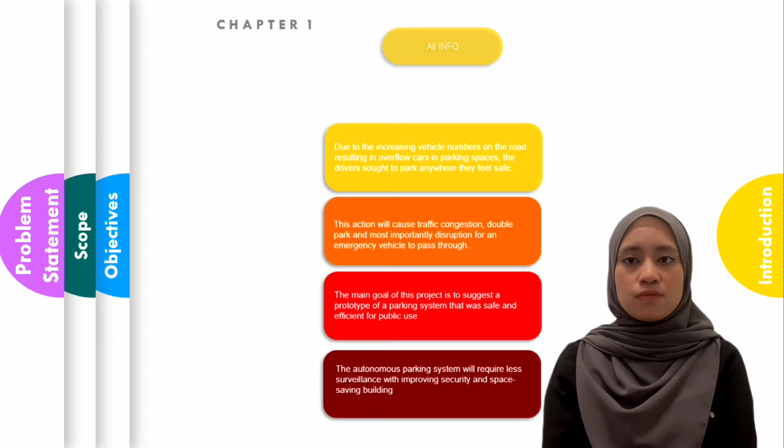So the main goal of this project is to suggest a prototype of a parking system that is safe and efficient for public use. The autonomous parking system will require less surveillance while improving security and space-saving building.

Next is the objectives. There are 3 objectives for our project. Firstly, easy accessibility to parking spots. Secondly, to provide safer parking spots - we want our customers to feel safe when using our vehicle integrated parking system service. Lastly, our aim is to build a convenient parking method.

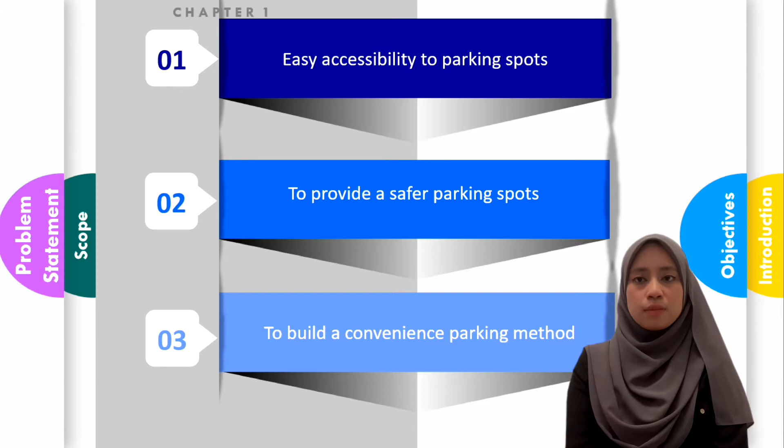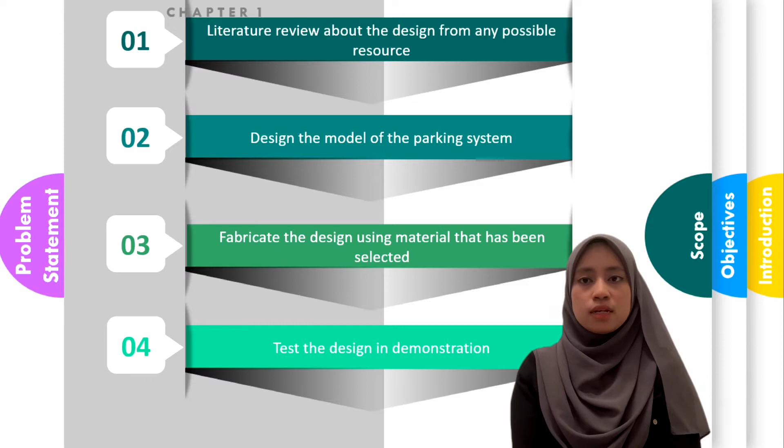There are several scopes involved in this project. First, a literature review about the design from any possible resource. Secondly, design the model of the parking system. Next, fabricate the design using material that has been selected. Last but not least, test the design in demonstration.

The next slide is the problem statement. Before starting this project, we noticed 6 problems that people nowadays may encounter. Then we came up with the idea of doing this project named Vehicle Integrated Parking System.

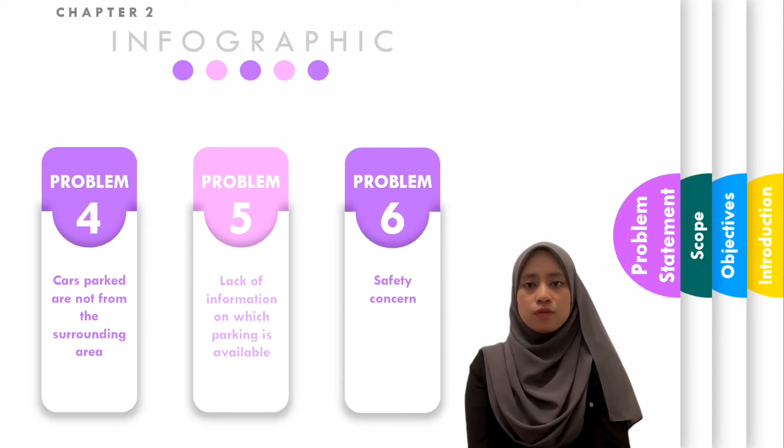The first problem is limited parking spaces, especially during peak time. Next, time-consuming and different parking policies. Thirdly, excessive automobile usage. Fourthly, cars parked are not from the surrounding area. Next, lack of information on which parking is available. Lastly, safety concern.

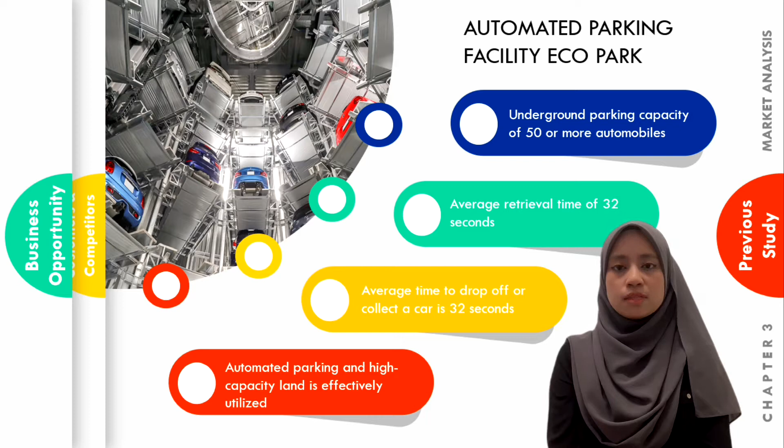With an average retrieval time of 32 seconds, it is a very efficient system. The average time it takes to drop off or collect a car is 32 seconds. It is automatic parking with high capacity, and land is effectively utilized.

Next, the towering parking system. This parking system uses the concept of multi-level towering building design. This design has the capacity for up to 60 cars. It is also a space-effective installation, consuming only 3 parking spaces. The maximum weight for this design is 2,200 kg.

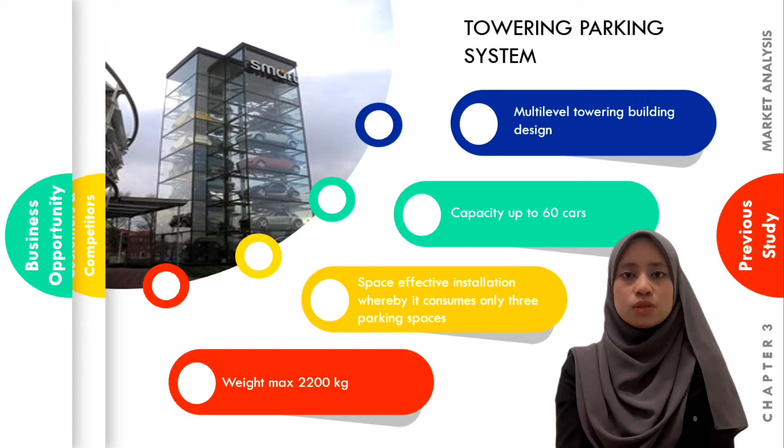Next, the vertical rotary smart parking system. This is an economical parking system because it requires only 50 square meters for a capacity of 50 parking spaces. It is convenient as customers can use PLC automatic control, a button or a swipe to access the car function. This system is fast and can save customers time, and is widely used in shopping centers, commercial buildings, hotels and so on.

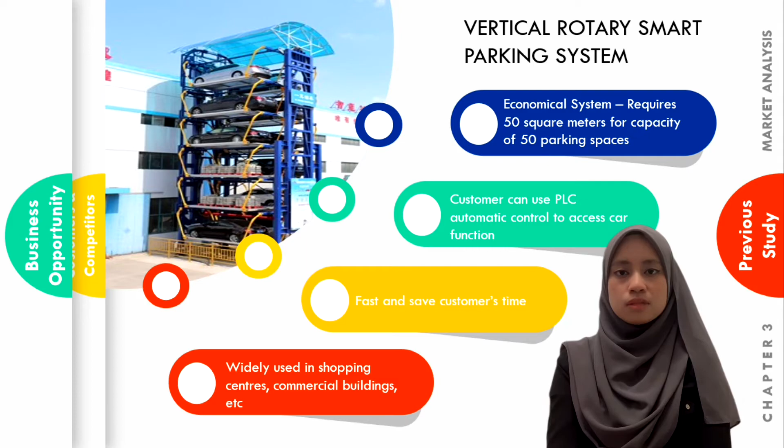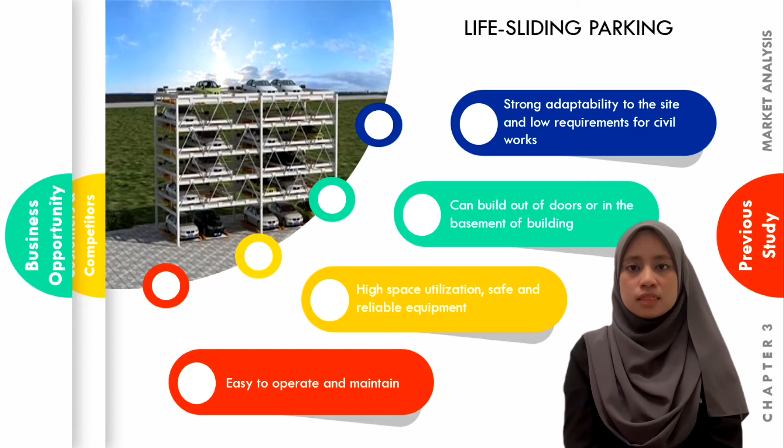This parking system can be built outdoors or in the basement of a building. One of its advantages is high space utilization, and safe and reliable equipment. This parking system is easy to operate and maintain.

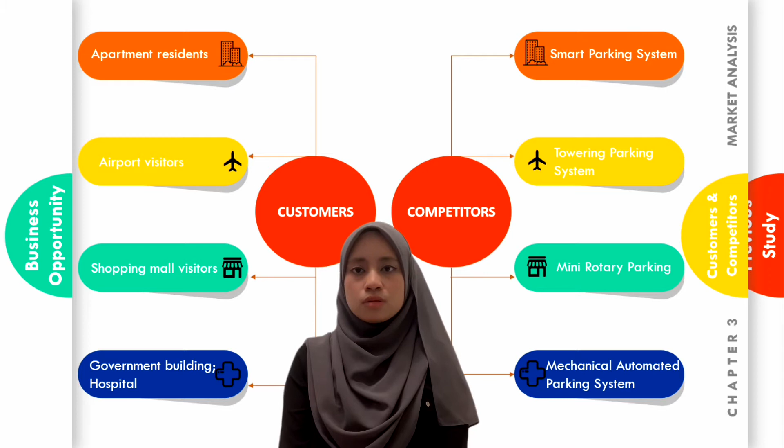Next slide is customers and competitors. A customer is a person who buys goods or services from a shop or business. Our targeted customers are apartment residents, airport visitors, shopping mall visitors, and government buildings such as hospitals. A competitor is an organization or country engaged in commercial or economic competition with others. Our targeted competitors are smart parking systems, towering parking systems, rotary parking, and mechanical automated parking systems.

Today I'm going to present about customer requirements and engineering characteristics. For the first customer requirement, easy accessibility to the parking spot. The engineering characteristic is an access card or smartphone application. The unit used is time, measured in seconds.

Customer requirement number 2 is safer parking spots. The engineering characteristic is limited access inside the system, and the unit is N/A.

The customer requirement number 3 is weatherproof, and the engineering characteristic is resistant weather. The unit is degrees Celsius.

Customer requirement number 4 is convenience parking method, and the engineering characteristic is automated drop and walk parking system. The unit is time.

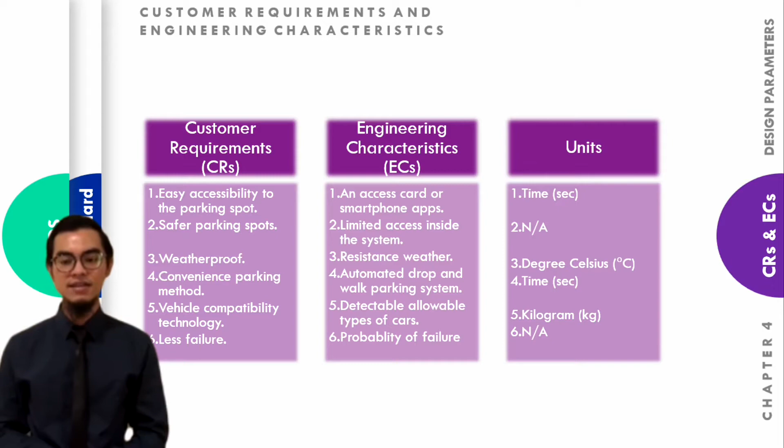Customer requirement number 5 is vehicle compatibility technology, and the engineering characteristic is detectable allowable types of cars. The unit is kilogram. The last customer requirement, number 6, is less failure, and the engineering characteristic is probability of failure. The unit is N/A.

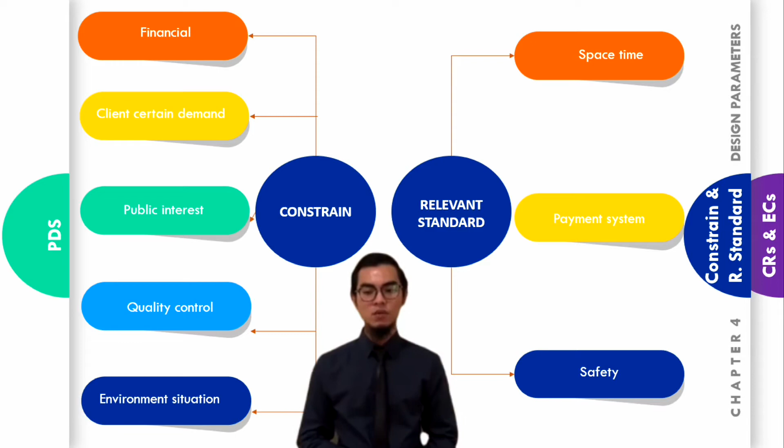Next, I will talk about constraints and relevant standards. There are 5 constraints: financial, client certain demand, public interest, quality control, and environment situation. For relevant standards, there are 3: space-time, payment system, and safety.

Now I'm going to talk about product design specification, key project deadline, physical description, and market identification. The first product design specification is our project name, Vehicle Integrated Parking System. Number 2, our project provides systematic automation and organized parking space.

Number 3 is about special features. There are 3 special features: accessible by using an access card or through a smartphone application; number 2, drop and walk parking method; and number 3, theftproof.

The fourth product design specification is key performance target. There are 3 key performance targets: weatherproof, easy parking method, and lesser failure percentage. The last product design specification is user training required: none.

For the key project deadline, we have 6 months to finalize design and report. The physical description, number 1, is external dimension.

For the prototype, the dimension is 50mm by 30mm by 10mm, and each of the 4 compartments for a car is 80mm by 70mm by 120mm. The material is to be determined.

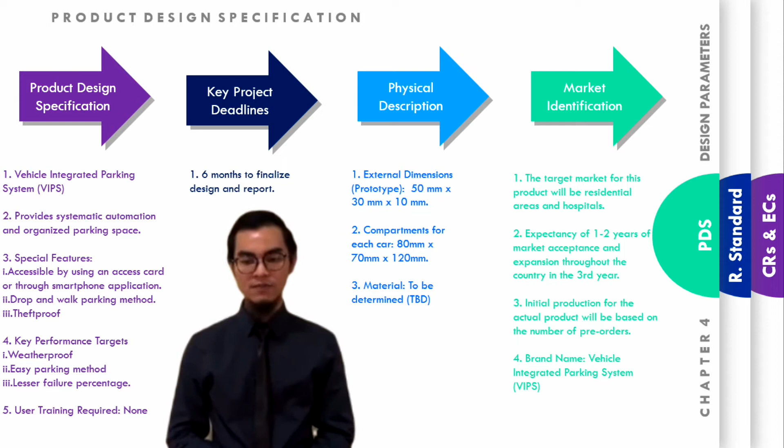For market identification: number 1, the target market for this product will be residential areas and hospitals. Number 2, expectancy of 1 to 2 years of market acceptance and expansion throughout the country in the 3rd year. Number 3, initial production of the actual product will be based on the number of pre-orders.

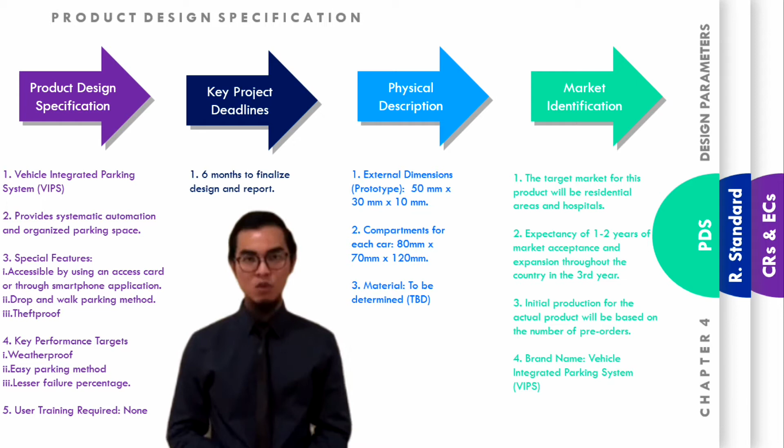This brand name is Vehicle Integrated Parking System, which is our project name. Next is about financial requirement.

There are 4 financial requirements. Number 1, pricing policy over the life cycle: target manufacturing cost is to be determined, and estimated retail price is 40% higher than the target manufacturing cost.

Number 2 is the warranty policy, which is 5 years with yearly inspection. Number 3, expected financial performance or rate of return on investment is more than 20%. The last financial requirement is level of capital investment required, to be determined.

For the life cycle targets, there are 4. Number 1, useful life and shelf life is more than 5 years expectancy. Number 2, cost of installation and operation is to be determined.

Number 3, maintenance schedule is yearly inspection and maintenance. Number 4, reliability, mean time to failure is 5 years.

Next I will talk about manufacturing specification. There are 2. Number 1, for the prototype, all framing, electrical motor, and gear components will be assembled in-house.

Number 2 is suppliers; the supplier is none. The next part is social, political and legal requirements.

There are 4 social, political and legal requirements. Number 1, safety and environmental regulations will be followed. Number 2, standard research federal regulation on available land. Number 3, safety and product liability.

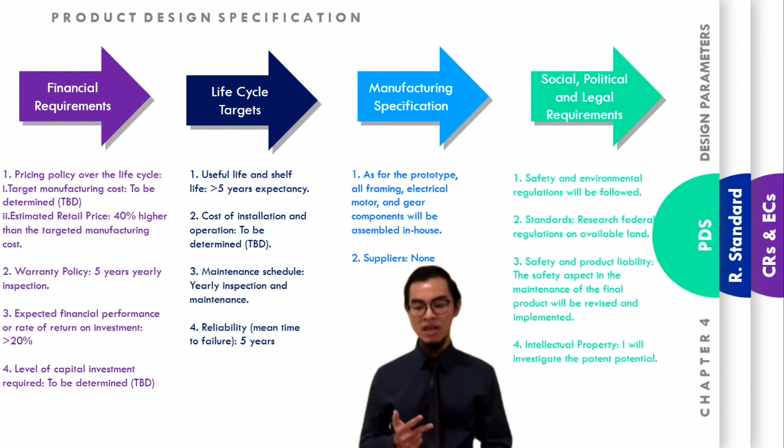What is a concept design? A concept design is a starting point on visualizing the product idea with multiple images. From the customer surveys, product benchmark, and product design specification, we came out with the customer requirement and engineering characteristic needed to draw our concepts.

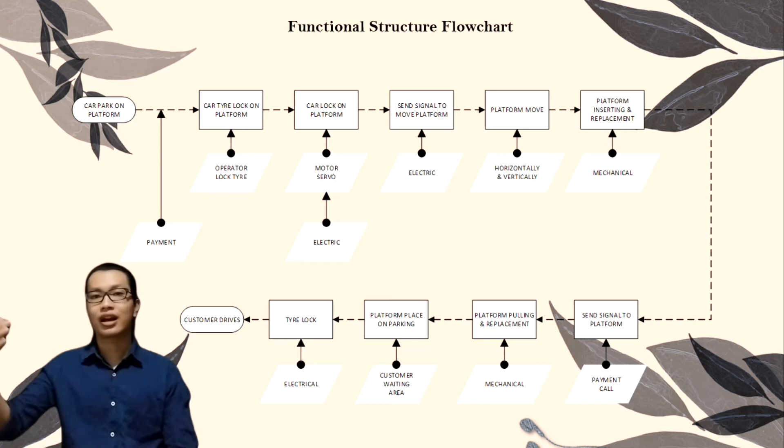Through that, we came out with the functional structure flowchart. This flowchart represents the process in our smart parking system, which we call Vehicle Integrated Parking System, from the car parking on the platform until the customer retrieves it back, without entering the building structure.

Using the flowchart from the previous slides, we came up with 4 individual concepts or options on how the mechanism would work for the assigned function. The assigned function starts from the payment method, using either a QR code, a coupon, a ticket, or manual payment requiring hard cash.

The next function is the car moving inside the building, either using a gear and rack, a belting system, or the customer parking the car into the building themselves.

The next function is pulling and pushing the car into and out of the multi-level parking, where the car is parked on the platform. The platform is pulled out or pushed into the multi-level parking.

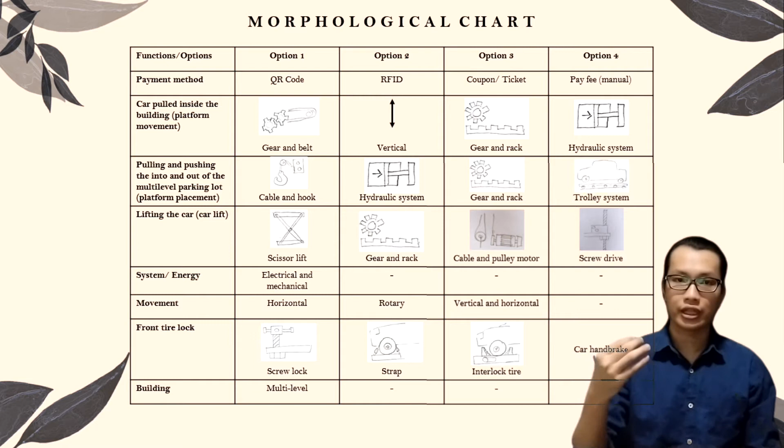The next part is lifting the car, the lifting system. We came up with different ideas such as scissor lifting, screw drive, or a pulley system. For the next one is energy, which is electrical and mechanical.

For the movement, it is either horizontal, vertical, moving forward or backward, or left to right.

And then for the tire lock, which is for safety, to avoid the car from moving around when the platform is moving, it is either a screw lock or a strap.

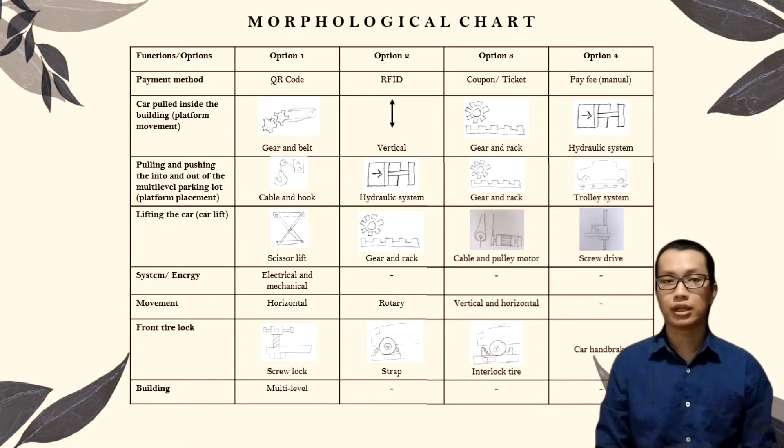For the next one is the building. The building is of course multi-level and weatherproof.

Part 4 is the individual concept. On this individual concept slide, we use a combination of functions to produce our concept 1, concept 2, concept 3 and concept 4. The combination is the tire lock.

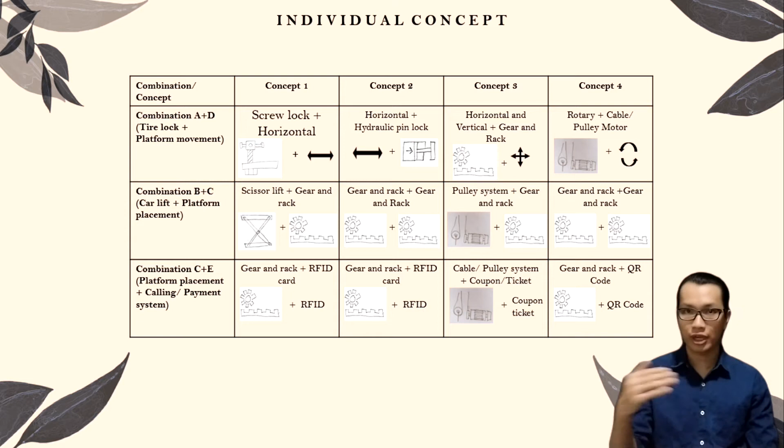The first combination is the tire lock and the platform movement. The next combination is the car lift and the platform placement, which is the car lifting system, from the lift to the multi-story parking structure.

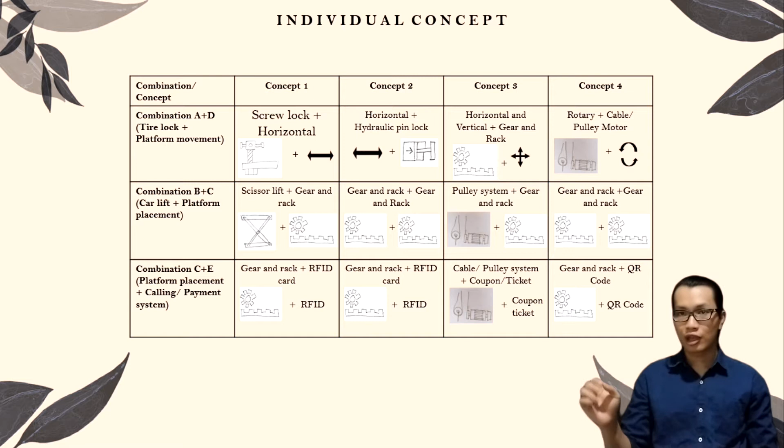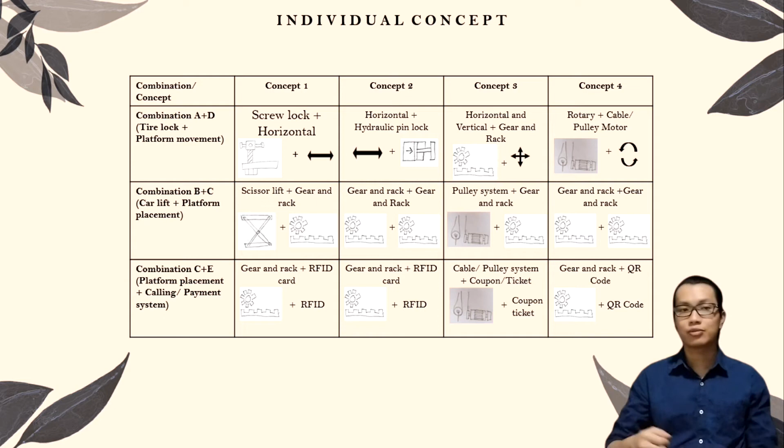And the next combination is the platform placement and the calling or payment system, which is when the customer wants to call back or retrieve their vehicle from the parking lot, they just have to pay or insert a certain code on the counter.

For this next slide, I'm going to explain concept 1 and concept 2. For concept 1, which utilizes the towering concept, this utilizes 3 parking spaces, which is quite space-saving because the structure is stretched vertically above, and can withstand a capacity of 8 cars on 3 parking spaces.

This towering concept consists of a lifting system and a rotation system, driven by electrical motors. For the payment of this towering concept, they use a numbering system to call out the car from the multi-level parking lot, and you can pay the fee at the counter.

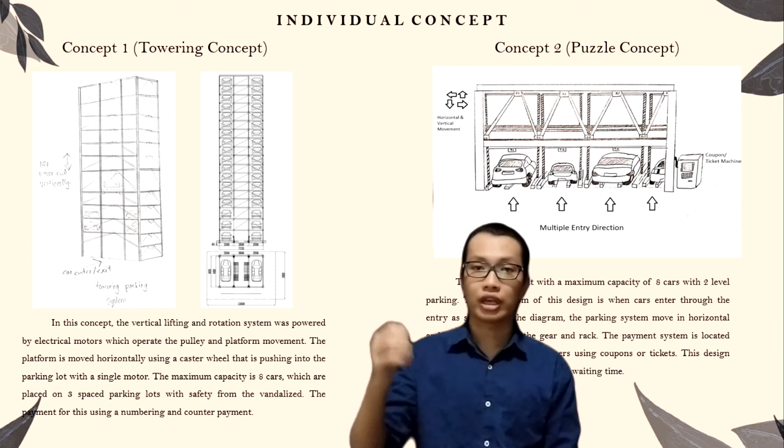For concept 2, which utilizes a puzzle concept, it is a 2-story parking system. This design allows multiple cars to enter and exit at the same time, which reduces the time to park the car. The payment system is located beside the entry to ease the customer, using a coupon or ticket to pay.

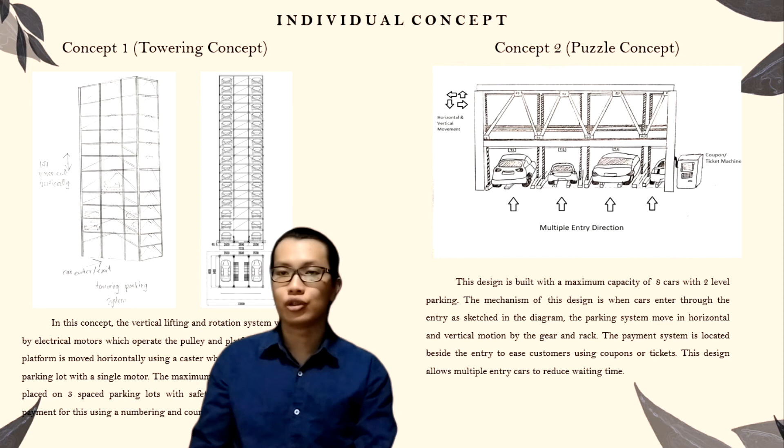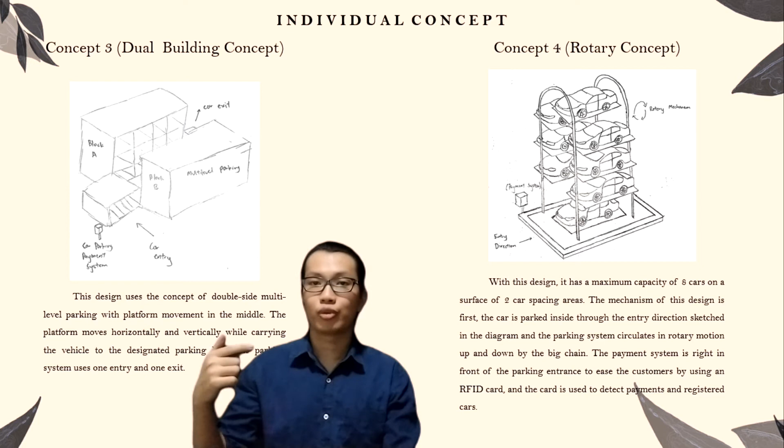The payment system uses an RFID card, and the card is used to detect the payment and register the cars for the next parking.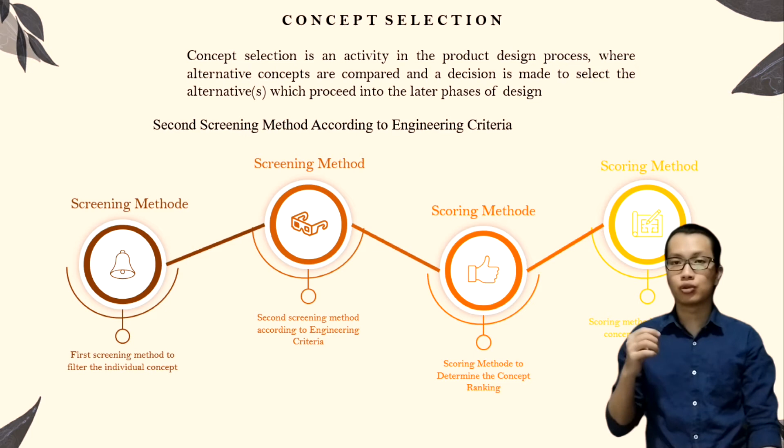For the scoring method, we use the weighted decision matrix to rank the concepts by design and fabricating feasibility, the most suitable condition. The result came up to concept 3, which is the dual building concept.

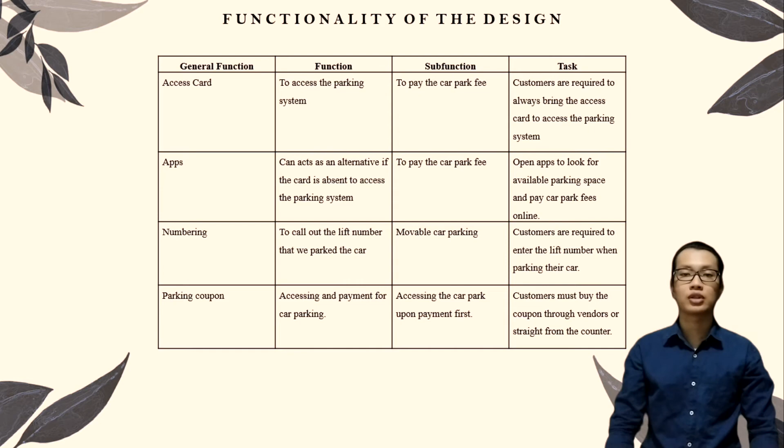The numbering system is used to call out the lift number for vehicle retrieval from the parking lot. Finally, the conventional parking coupon, where the customer must buy the coupon from vendors or directly from the counter at the multi-level parking.

In this chapter, I would like to explain further on the embodiment design. After the final design is constructed using SolidWorks, the structural analysis of the finite element analysis of the design is simulated using ANSYS.

As shown here, there are 2 critical components being simulated, which are the parking pallet and the parking platform. As for the structural analysis of the parking pallet, the load is applied on the tire pathway of the pallet, representing the force acting by the car tire movement on top of the pallet.

As for the parking platform, 2 different loads are applied on the parking platform as shown here. The load represents the pulling process of the parking platform and the load from the parked car.

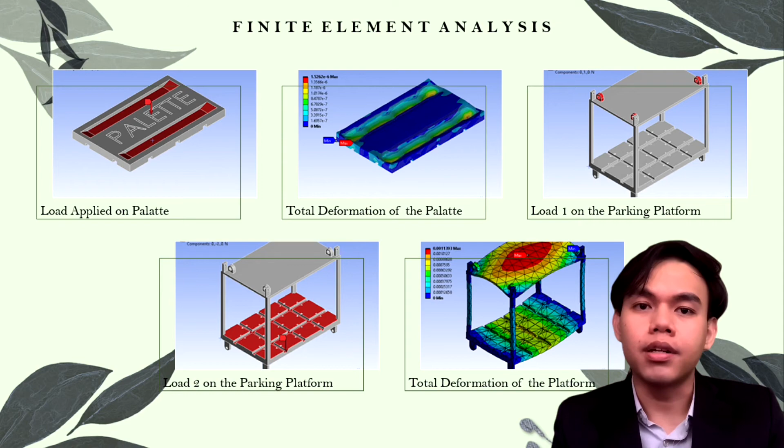The total deformation results are gained, and we found out that the deformation are mainly formed on the tire pathway from the pallet and deformation on the roof and the base of the parking platform. Next, several project calculations were made in terms of engineering analysis, such as motor calculation for the electric motor use, mass moment of inertia of the gearing system, and from the surface area of the car we can also determine the force acted on the car and total stress applied on the top of the slotting mechanism.

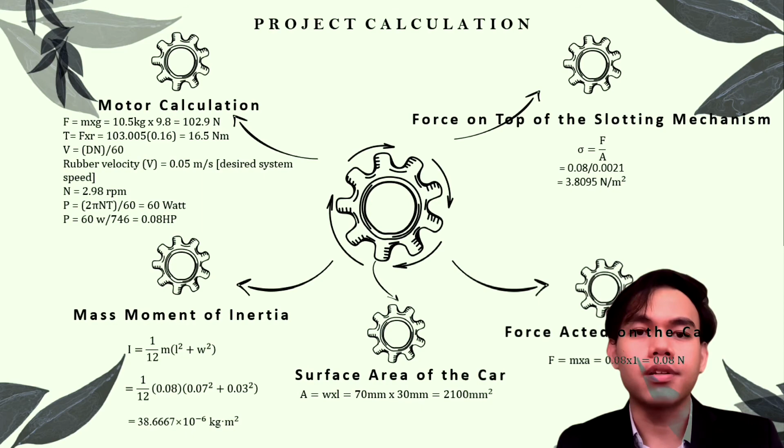In this slide, I would like to explain more on our design for manufacturing and assembly, known as DFMA. DFA, designed for assembly, and DFM, designed for manufacturing, is a combination method used to optimize ease of assembly, simplifying and refining at a lower cost for the best product. Therefore, an assembly chart is constructed component by component to visualize the procedure and its inspection process.

From the assembly chart here, the first component being constructed is the parking platform, and its sub-assembly consists of the platform itself, tire lock, conveyor belt, and a sensor. The component will then undergo the first inspection, and the first assembly is completed.

Next is the horizontal moving platform assembly, whose sub-assembly consists of platform rail, gear and rack, and electric motor. Then the process assembly of the vertically moving platform and multi-level parking structure is repeated, complete with its inspection process respectively.

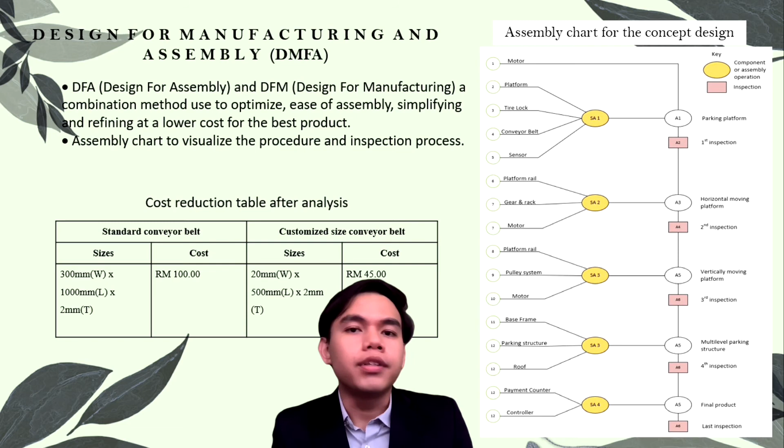Also, the cost reduction analysis is gained, where we determine that the initial cost for a standard conveyor belt costs around 100 ringgit, and after reduction, the customized size of conveyor belt costs only around 45 ringgit.

In the next slide, to avoid failures, failure modes and effect analysis, FMEA, is employed in our project. FMEA starts at the very beginning of the design process and continues throughout the product or service life cycle. As we can see from the table, high RPN value is at the slotting mechanism, where the failure mode is jamming, causing the slotting mechanism to stop working.

Therefore, redesigning and improvements are performed by replacing the chain conveyor with a rubber conveyor. Thus, after the improvement, the severity and detectability values are highly reduced.

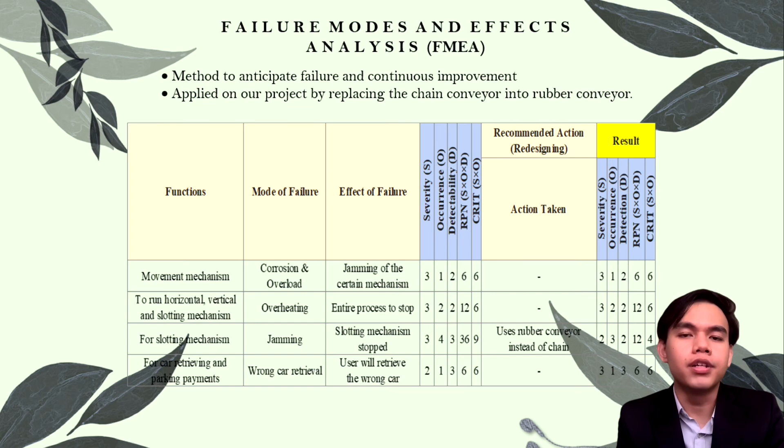Lastly is the human factor, where we study the interactions between our operator and worker in the way they work with the system. By applying the RULA table as shown here, we can determine the score ranking of the operator's exposure to ergonomic risk factors. An ergonomic evaluation technique to recognize hazard factors of the stance, power, and muscle hazard factors are done together for table A and table B.

The scores are 3 and 4 separately. All stances are for the most part grouped at class 2 and class 3. Thus, it is perceived that the gathering individuals don't confront a basic postural issue concerning ergonomics.

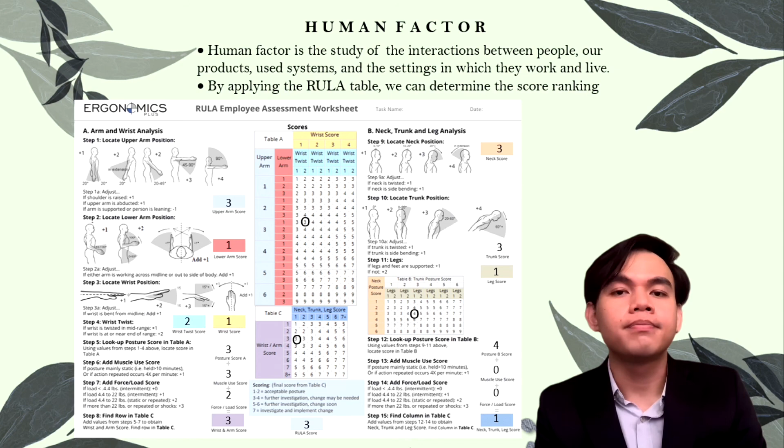It can be seen that the final score using the RULA procedure at table C is 3, which shows that it should be decreased further in the future, and changes might be needed to accomplish it. That's all from me. Thank you.

Now I'm going to talk about the engineering drawing of our project, which is the vehicle integrated parking system.

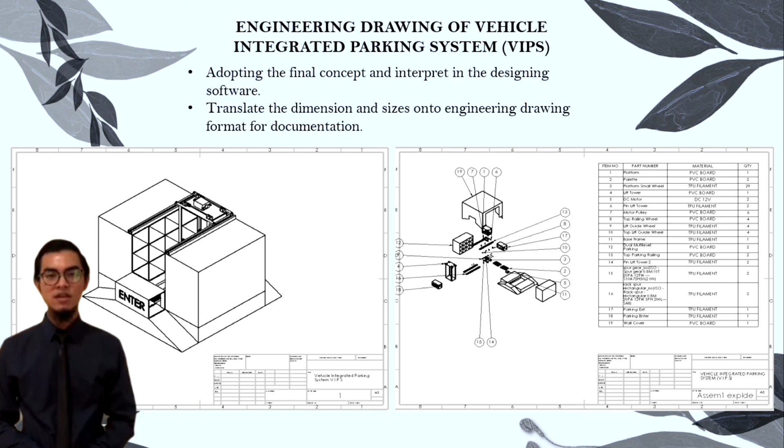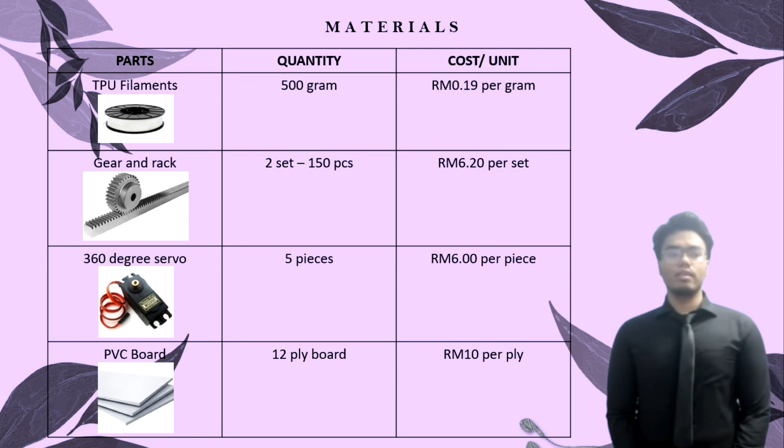The material our group will use is TPU filament, which costs 19 cents per gram, and we will use about 500 grams. Secondly, we will use gear and rack, which costs 6 ringgit 20 cents per set, and we use 2 sets. Next, we use a 360-degree servo, which costs 6 ringgit per piece, and we will use about 5 pieces. Last but not least, we use 12-ply PVC board, which costs 10 ringgit per ply.

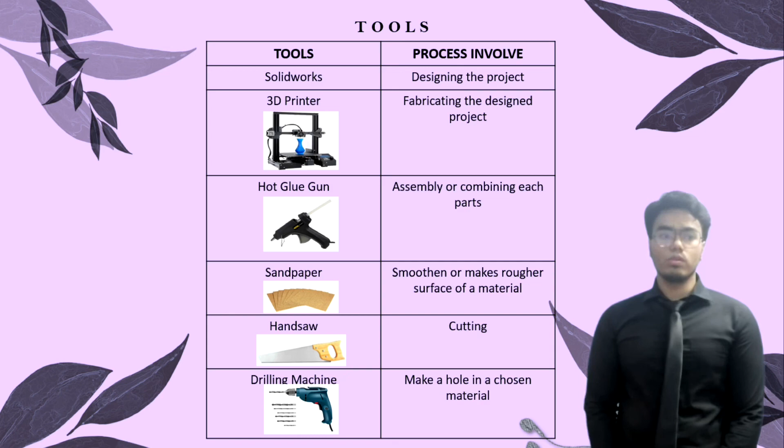We use SolidWorks software to design our project, and the tool we use is a 3D printer for fabricating and designing our projects. Next, we use a hot glue gun to assemble and combine each part. Secondly, we use sandpaper to smoothen or roughen the surface of materials, and we also use a hand saw for cutting, and last but not least, we use a drilling machine.

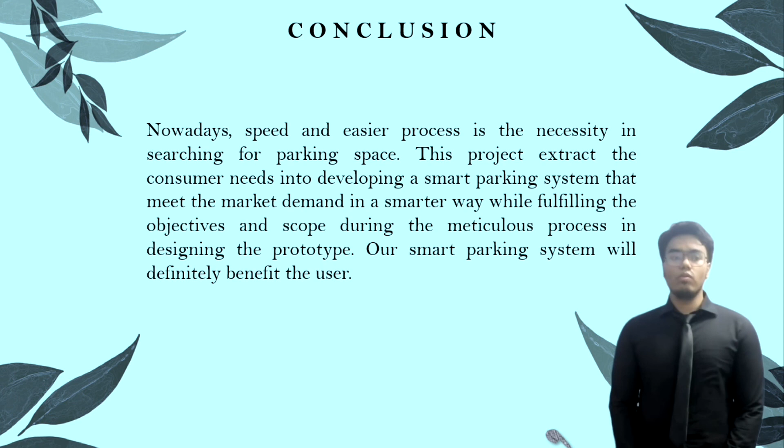As a conclusion, nowadays speed and an easier process are necessities in searching for parking space. This project extracts consumer needs into developing a smart parking system that meets market demand in a smarter way, while fulfilling the objective and scope during the meticulous process of designing the prototype. Our smart parking system will definitely benefit the user. Thank you.